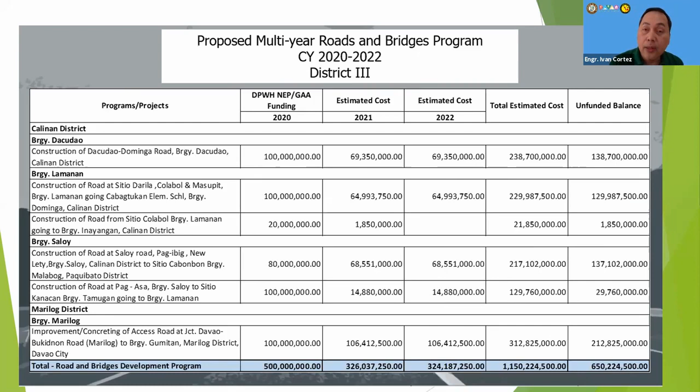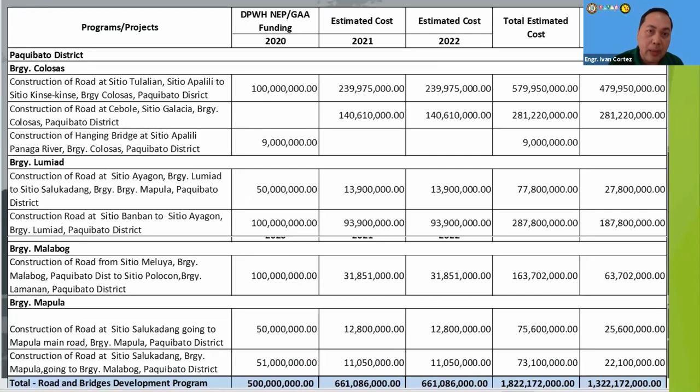We get grants from national government agencies, and shown on screen is a sample of multi-year coordinative funding engagement with DPWH for our roads and bridges program. The one on screen is for District 3, totaling over 1.1 billion pesos, mostly found in the barangays of Calinan and Marilog District, Lamanan also, and Saloy. For District 2, these are some of the projects also under the multi-year roads and bridges program. If you're looking at the screen, you will find that 2020 was already taken up with DPWH under the GAA, or General Appropriations Act.

And then if you're also wondering how we prioritize projects, these are the sources of projects. These documents are the sources of projects. We have mandated plans.

Mandated plans for other initiatives, such as the studies conducted with JICA and other agencies such as ADB. So for the mandated projects, we have the Comprehensive Development Plan. It's updated for 2019 to 2022. We have the Comprehensive Land Use Plan. This is for 2014 to 2022, and the proposed amendments for 2021 to 2028 is now scheduled for second reading

at the City Council. So we're just waiting for the advice of the City Council as to when the second reading will be. We've conducted a series of committee hearings already for the amendments of the CLUP, or the Land Use Plan, or the Zoning Ordinance since October last year to this year.

Executive legislative agenda. This is the time when newly elected councilors will convene together with the mayor and the vice mayor to plot the priority projects for the city. So executive legislative agenda is also part of the listing of projects, wherein we take a look at how to prioritize those projects listed.

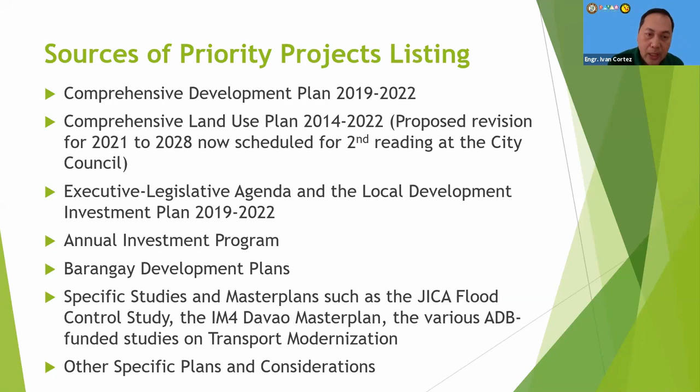And then we have the annual investment program, the barangay development plans, and specific studies and master plans, such as the JICA flood control study, the IM4 Davao, or the Infrastructure Modernization for Davao project, the ADB funded studies on transport modernization, and other specific plans and considerations.

So for other specific plans and considerations, we have the road network development roadmap, the traffic management plan, mobility plan, urban services development plan, economy industry concerns, and social environmental considerations. So some of these plans are also incorporated in our comprehensive development plan.

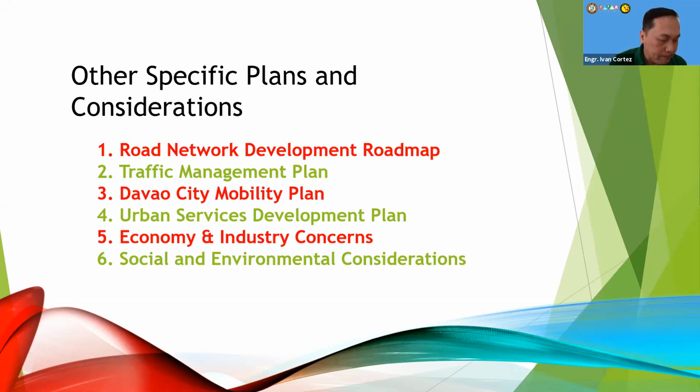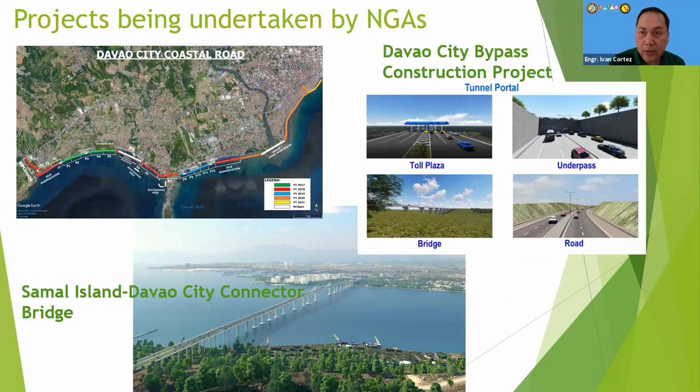On screen are some of the projects being undertaken by the national government for the benefit of the people of Davao. I will not expound on them as they will be presented by the concerned agencies. These are the Coastal Road Bypass Construction Project and the most famous Samal-Davao City Connector Bridge. Also in the pipeline is the Davao City Expressway Project. This has three sections: the Ma-a interchange, the Panacan interchange, and the interchange that will connect Ma-a to Dumoy.

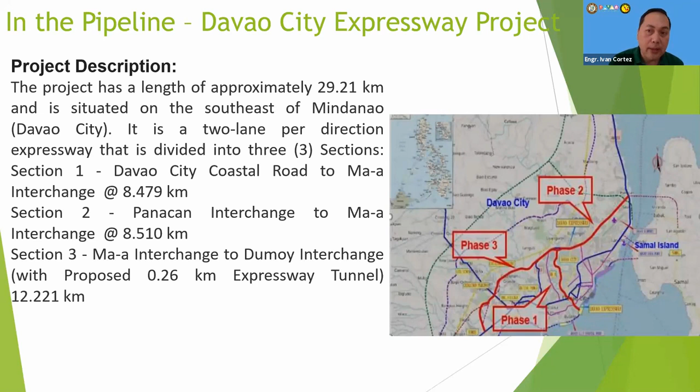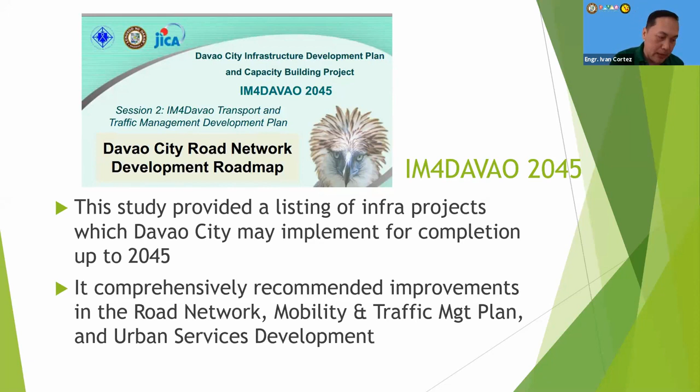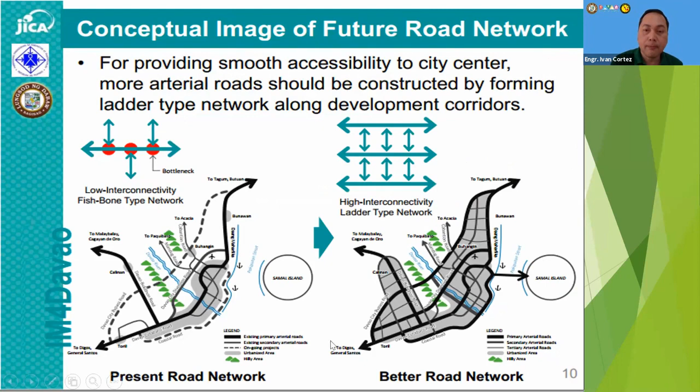Okay? Masyadong malaki.

You will find there on the left side of the screen the present road network, and we're planning to have a better road network by having parallel roads. One of those is the bypass construction project, and also lateral roads crossing each other. Our road network will make sure connectivity and even redundancy and accessibility is enhanced for better productivity and efficiency.

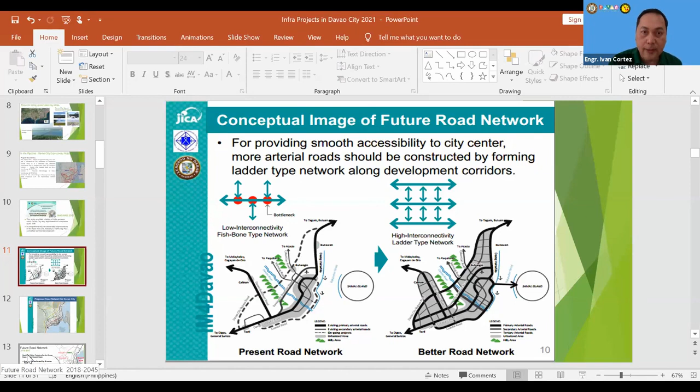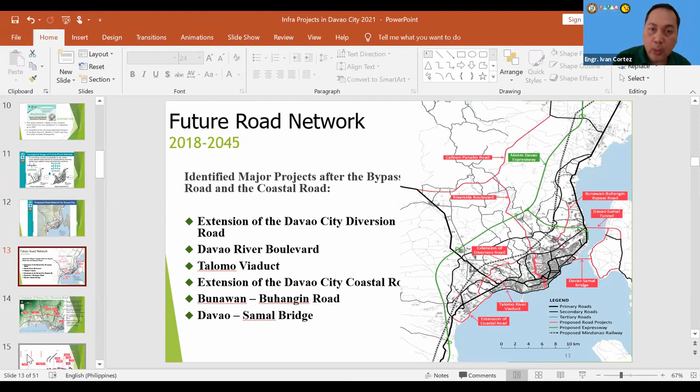So some of the major projects identified in that IM4 are the following. We have the extension of the Davao City Diversion Road, the Davao River Boulevard, Talomo Viaduct, extension of the Davao City Coastal Road, the Bunawan-Buhangin Road, and the Samal Bridge. Those are included already in the 2018 to 2045 IM4Davao study.

So this is an illustration of the extension of the Davao City Diversion Road. As you can see, if you're using the Davao Diversion Road, you will still have to pass through Bangkal. That's where the choke point comes in. And in order to solve that problem, you don't have to go down from the diversion all the way to Bangkal just to meet the traffic there. So this is the solution provided in that study.

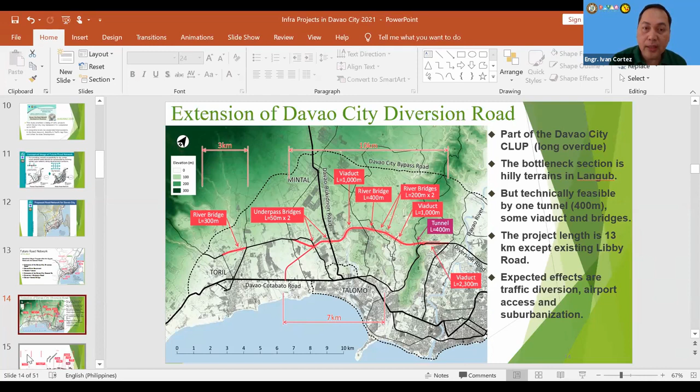So in that study, you'll find that this is an illustration of the bridges that will be needed in order to connect all these road projects and provide that extension for the Davao Diversion Road. This will also require a tunnel, a 400-meter tunnel.

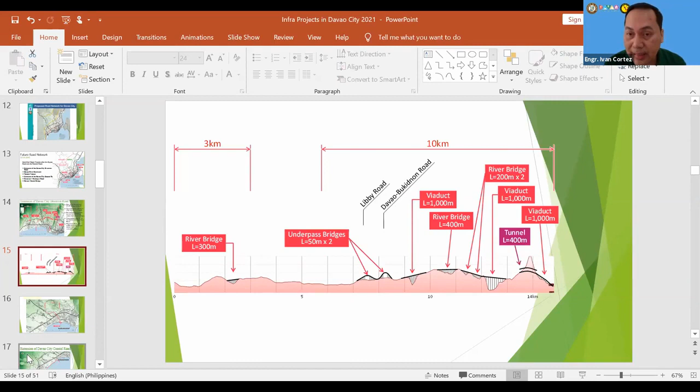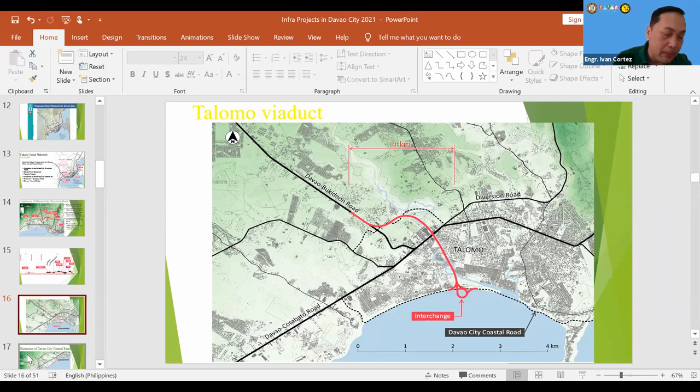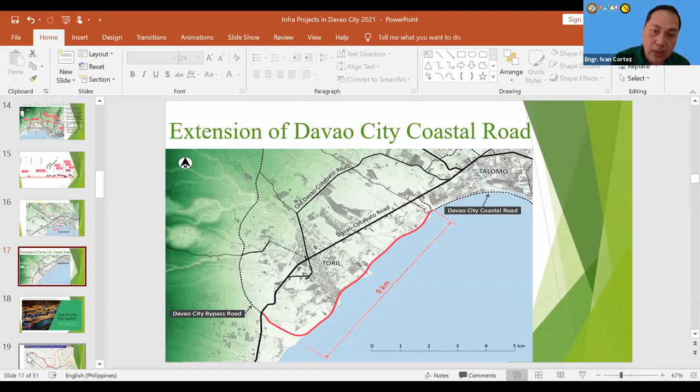The Talomo Viaduct is seen to decongest the Davao Bukidnon-Ulas intersection. This is also in the pipeline already. And then the extension of the Davao City Coastal Road. The extension of Davao City Coastal Road is also in the pipeline. This will connect the coastal road to the bypass road. The extension is in red line, and then you will see the dotted line, that's the Davao City Bypass Road. So from Bago Gallera all the way to the Toril coast, and then all the way to the bypass road.

We are in the thick of things in finalizing the land acquisition activities of bus depots, bus terminals, and bus stops for a high priority bus system, which will have 1,000 buses replacing the 7,000 plus PUJs in the city. This is in coordination with the Department of Transportation. They are the one funding the project.

In preparation for the HPBS, or the High Priority Bus System, the City Government of Davao is already implementing the DIBS, or the Davao Interim Bus Service. In the first quarter of 2021, we have already provided bus services for Catalunan Grande and the Diversion Road route. And the mayor launched these routes just recently.

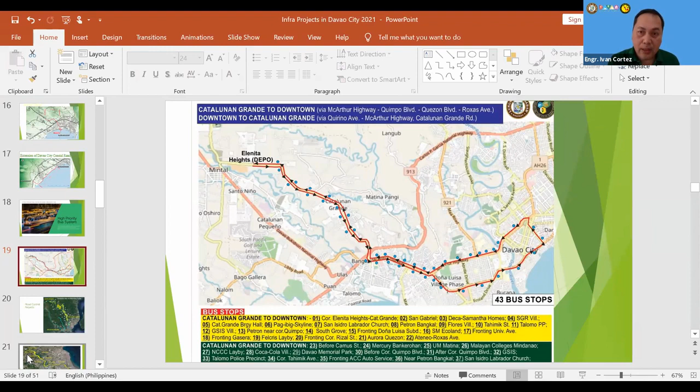We also continue to address flooding concerns. The biggest flood control project that we will schedule for implementation is contained in the IM4Davao study again, which will include... the study also was taken up after the IM for Davao. JICA also commissioned another group of consultants to take up the flood control and riverine projects, involving Davao River, Talomo, and Matina River. So in that study report of JICA, they have already suggested the strategies as well as the listing of projects that must be undertaken in order to address the flooding concerns in the downtown area.

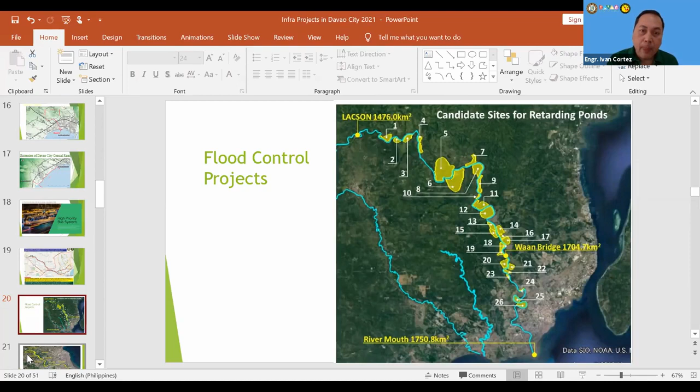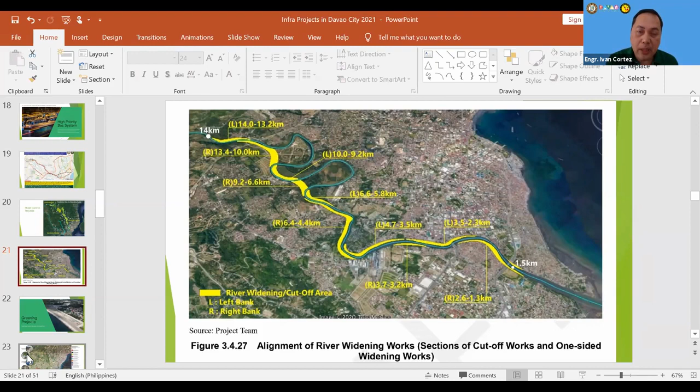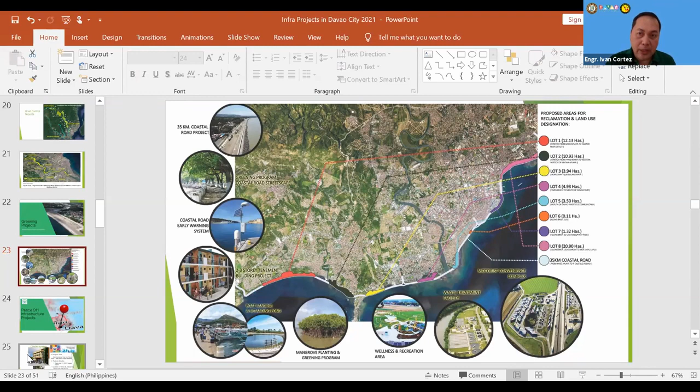So again, the spaces that will be created because of the reclamation project, which is the coastal road, our technical people at the city have come up with this scheme for those spaces, which might include tenement housing, early warning device system, wellness and recreation area, wastewater treatment facility, underground flood control projects, because basically the coastal road created a fence and obstructed somehow the flow of storm water from draining to the sea. But overall, the areas will be largely for greening purposes, as instructed by the mayor. So those areas that were created by the coastal road will really be largely for greening purposes.

Earlier, you've also seen multi-million road projects for the rural areas in districts 2 and 3 for Marilog and Paquibato, but be informed that we have the Peace 911 infrastructure projects. This will allow our fellow Davaoenos in these areas better access to services and facilities, as well as improve their living conditions. When we ask them what infra projects they need, on top of the list are roads, water system, buildings for health centers and schools.

If you will notice, these are areas which are not yet being served by the Davao City Water District. So when these barangays were given the 20 million funding from the national government through ELCAC, end local communist armed conflict project, most of the projects submitted were on roads and water system, as well as school buildings and health centers.

Talking about buildings as part of the infrastructure menu of projects, allow me to show you some of the buildings being constructed in the city, which are aimed to pave the way for better public services.

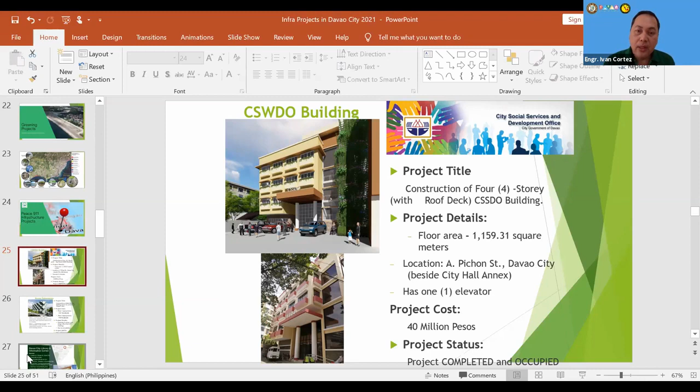On screen is the CSWDO, or the City Social Services and Development Office Building. This project is already inaugurated. Blessing na sila dito. It is a 40 million project.

And then you have the Museo Davaoenyo. The library project for Davao is a 4-story project wherein the higher you go up in that space, the quieter it gets. For the first floor, you can have group discussions. Second floor, you have the learning amphitheater. Third floor, you have the formal reading area where it's really very quiet. And for the fourth floor, you have the administrative area and the AVR.

Let me go back to the museo. Museo is a 195 million project, and this will be managed by the national government once open. So this will become part of the itinerary of every Davao visitor once completed.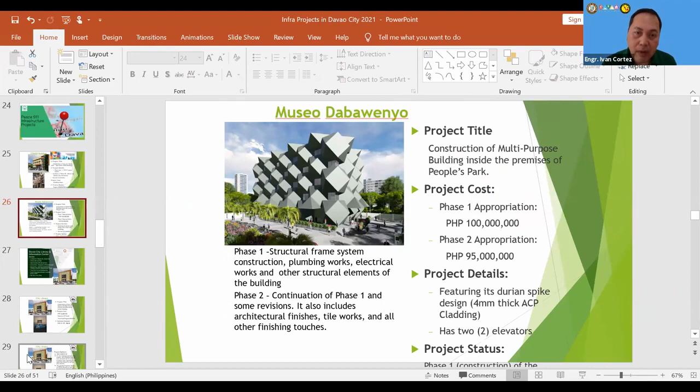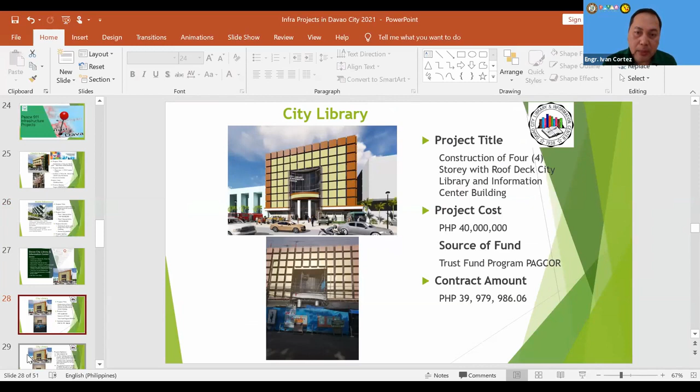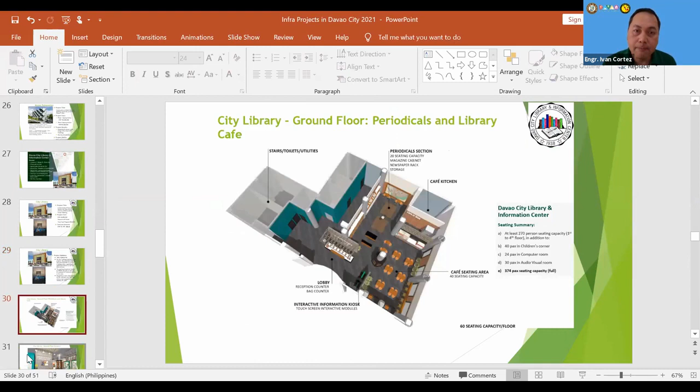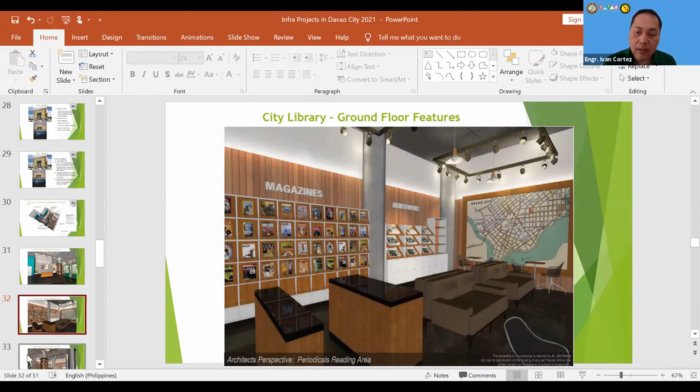Okay, City Library again, 40 million, but the contract amount was 39.9. It's 100% completed in terms of the library structure, but we're still dealing with issues on ISF in the parking area. So these are what's inside the City Library. If there was no pandemic, we would have already opened this to the public on a 24-hour basis, so people can have a place to do their research and other academic pursuits.

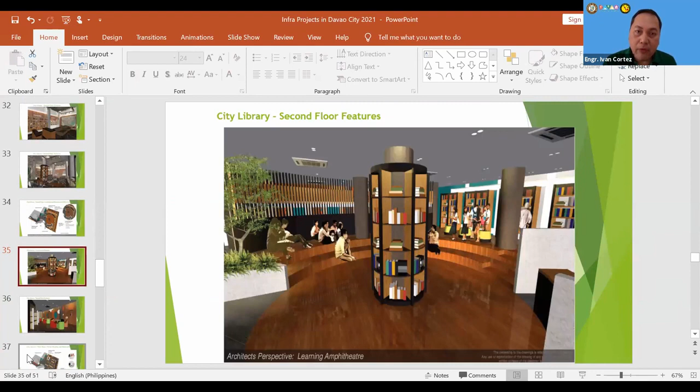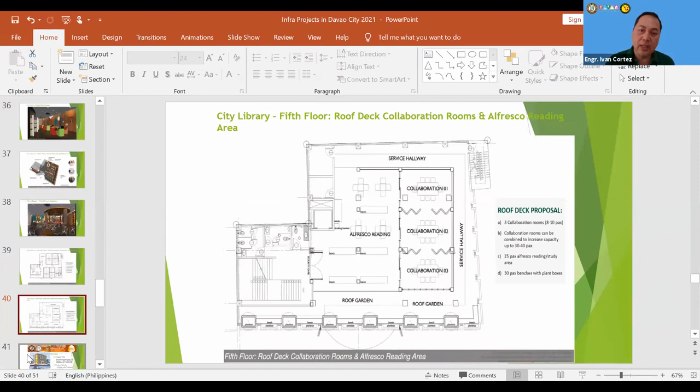Ground floor, that's the second floor of the area. Second floor features. We have the third floor, this is how it will look like. Fourth floor, administrative building. Fifth floor is roof deck. These are some of the suggestions for the utilization of the area.

Another building is the city engineer's office. The contract cost is 60 million, but there's an additional allocation of 80, so it's already about 140 million.

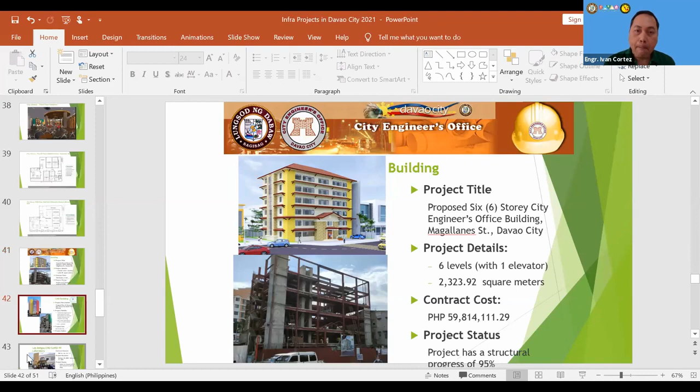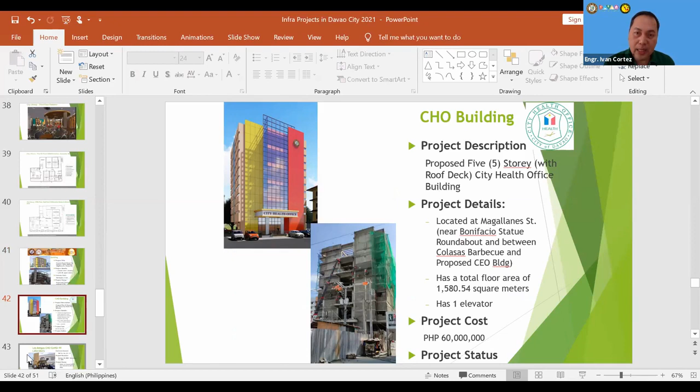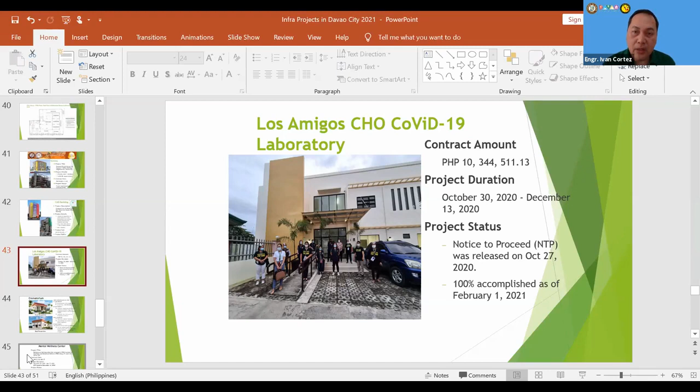So magkapit-bahay lang sila. And then we have just completed the Los Amigos CHO COVID-19 laboratory, a project cost of 10,344,000. And then the crematorium, this is also operational already.

We have the mental wellness center. Notice to proceed was issued last December. Project is ongoing with a progress of 1% as of January 31.

And then the Davao City Special Needs Intervention Center, project cost of 4.5, is in ALS People's Park, Pelayo corner Palma Gil Street.

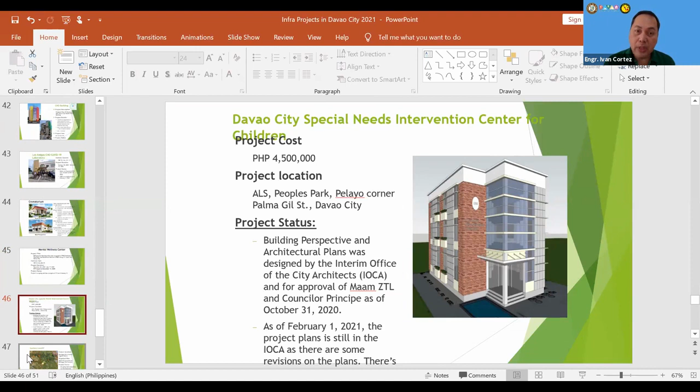Sanitary landfill, we need to have another landfill in the city, and we're targeting the areas beside it to serve the purpose. Instead of scattering landfills all over the city, we decided it's wise to have the next landfill near the current one, so we will not scatter the not so pleasant amenities of a landfill.

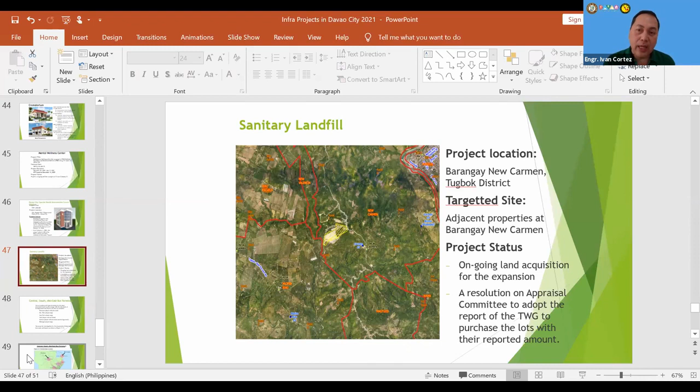Also in our plan and pipeline is the Central, South, and Mid-East bus terminals. We're correcting the notion that Bunawan is the north of Davao, because if you look closely at the entire map of Davao City, Bunawan is really in the Mid-East portion. If you're referring to the northern part of Davao, you're referring to Marilog and Paquibato, with Marilog being in the northwest and Paquibato in the northeast of Davao City.

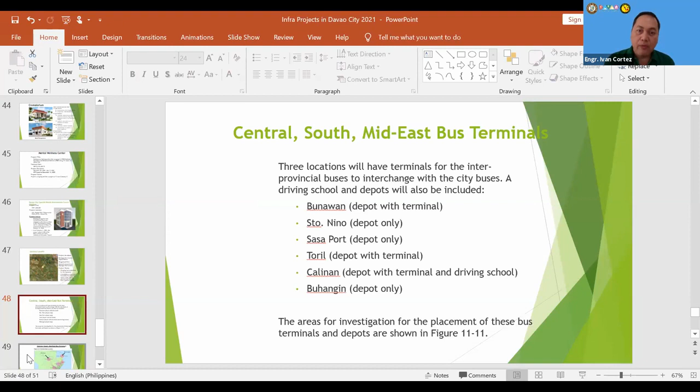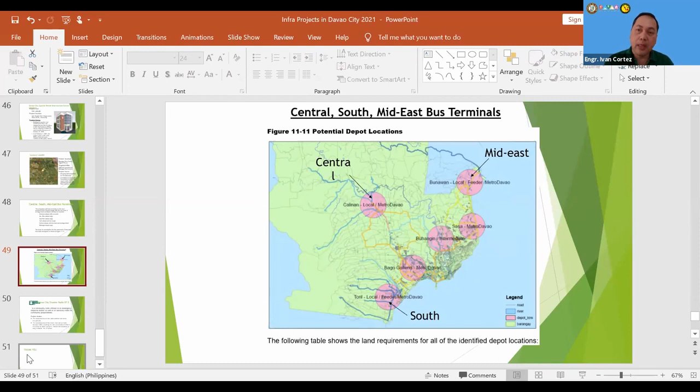So we'll have terminals for provincial buses: central near Calinan, south near Toril, and mid-east bus terminal near Bunawan. We've already scouted areas where these terminals will be located. The idea, as I mentioned earlier about the HPBS, is that once commuters reach the provincial terminal, they will switch buses from provincial to HPBS at those terminals established in the city.

I'm mentioning here the city disaster radio, not purposely to encourage all of you to listen to it, because the mayor is always on board on this channel, 87.5 FM, but also because this relates to my topic about infrastructure, since we are already allocating funds to construct the city tower for radio in the city, so we can have our own tower for this disaster radio. Thank you very much.

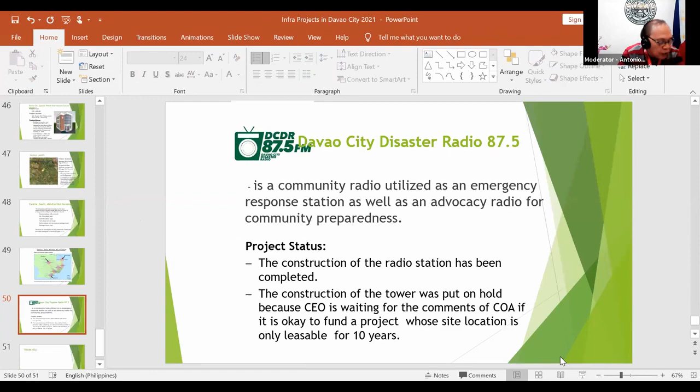This Davao City Bypass Construction Project starts from the Davao Digos section of the Pan-Philippine Highway, Barangay Sirawan, south of Toril, Davao City, approximately 500 meters south of Lipadas Bridge. It will proceed in a northeast-west direction towards Barangay Marapangi and Bato, where it will shift slightly northwest upon crossing the Padas River.

After crossing the said river, it will traverse Barangay Lubogan, Alambre, and move northward into Barangay Gili and Barangay Usiro until it reaches the University of the Philippines Mindanao campus in Barangay Mintal. Then, as the alignment passes to the town proper, it will traverse the Davao area.

This is the Davao-Bukidnon Road. It will cross the Talomo River, then proceed in a northwesterly direction towards agricultural land in Barangay Matina Biao, crossing another waterway, the Matina River, before it proceeds to the tunnel section in Barangay Magtuod. After the tunnel section, it will continue in the same direction towards Barangay Waan, crossing the Davao River.

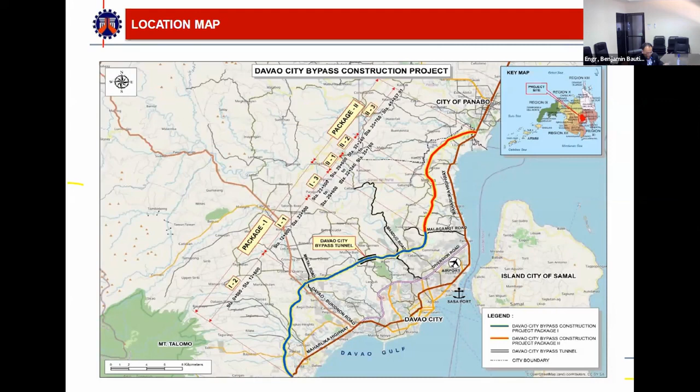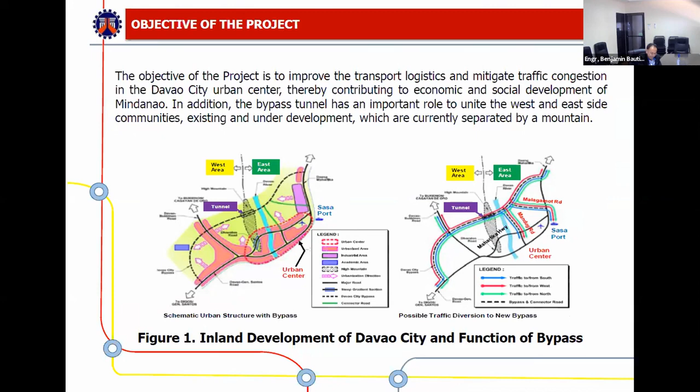This project aims to improve transport logistics, as shown earlier by the previous speaker, and mitigate traffic congestion in the Davao City urban area, thereby contributing to the economic and social development of Mindanao. In addition, this bypass tunnel has an important role in uniting the West and East communities, existing and under development, which are currently separated by a mountain.

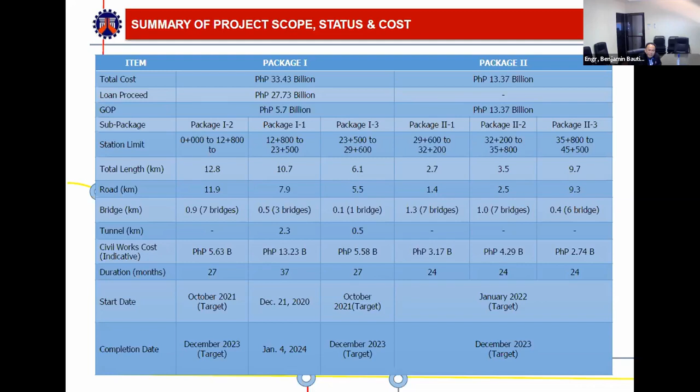Originally, this Davao City Bypass project was divided into two packages, but because the cost of the project is very big, we further divided package one into three contract packages: 1.1, which is now ongoing, 1.2, and 1.3. Package 2 was also subdivided into three contract packages: 2.1, 2.2, and 2.3. Package 1 started December 21, 2020. This is now the implementation schedule—we are now on package 1.1, which began construction last December 21 and will be completed by the end of 2023.

And for package 1.2, 1.3, it is now under procurement. And then also for package 2.1, 2.2, and 2.3, it will be procured by the third quarter this year.

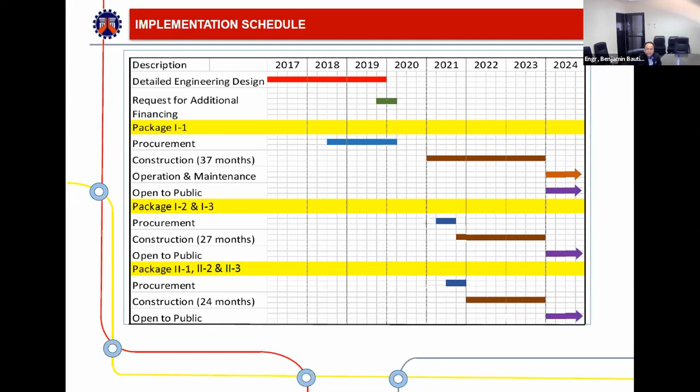So for package 1.1, the scope of work is construction of 4 lanes, meaning 2 lanes each direction, with a length of 7.9 kilometers with 3 pairs of bridges, length 0.5 kilometer, two underpasses, 2 overpasses, 15 box culverts, 4 at-grade intersections, and 2 tunnels with a length of 2.3 kilometers. It is under contract with the Shimizu, Ulticon, Takenaka joint venture, and the project cost is 13.2 billion, started December 2020, and expected completion is January 4, 2024.

So as of now, the project schedule status is we have achieved 0.48% accomplishment.

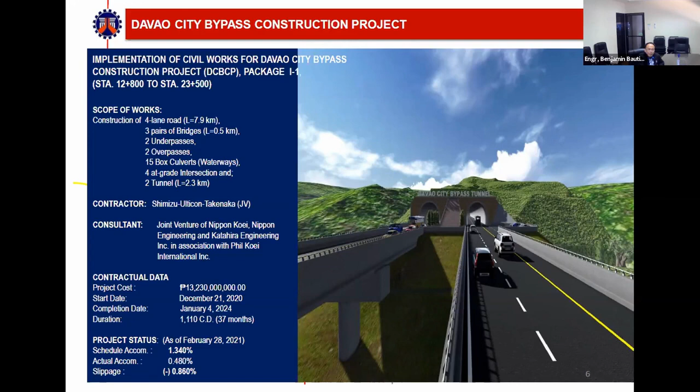And this is now the ongoing activities of Package 1-1. We started installing the project signboard and also mobilization of equipment.

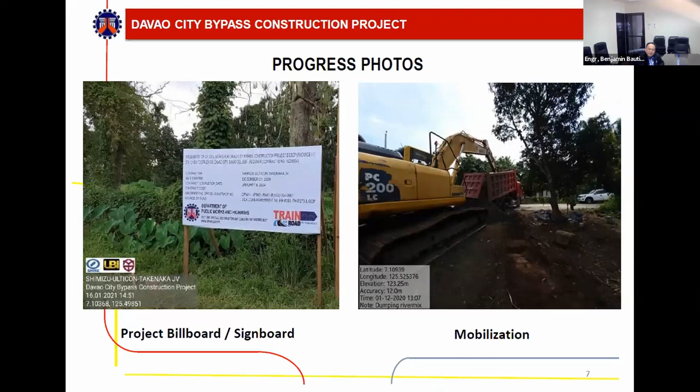We are now on the improvement and construction of the access roads leading to the main alignment, especially the portals of the tunnels, so that the equipment coming from Japan, especially the boring equipment, which according to the contractor is already ready for shipment, will be directly transported from the port in Davao to the portals of the proposed tunnel.

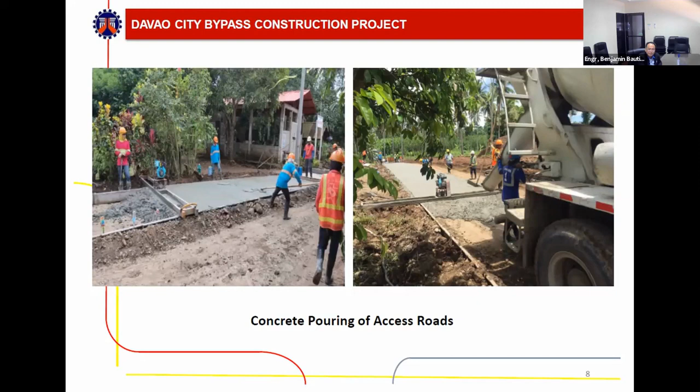With regards to package 1-2, it is also a 4-lane road, 2x2, with a length of 11.9 kilometers, 7 bridges, and 1 underpass along Davao Bukidnon Road. And package 1-3 is also a construction of 4-lane road with a length of 5.5 kilometers, 1 bridge, and 2 cut and cover tunnels with a length of 0.5 kilometer.

As of now, the status of these 2 contract packages: the project cost is estimated at 5.63 billion for 1-2 and 5.58 billion for 1-3. The target start of this project is October, the last quarter of this year, and target completion will be December 2023.

Now we are just waiting for the concurrence of bidding documents from JICA. Once JICA Tokyo concurs with the bidding documents, the procurement will start. So expectedly, the procurement will start by the fourth week of April.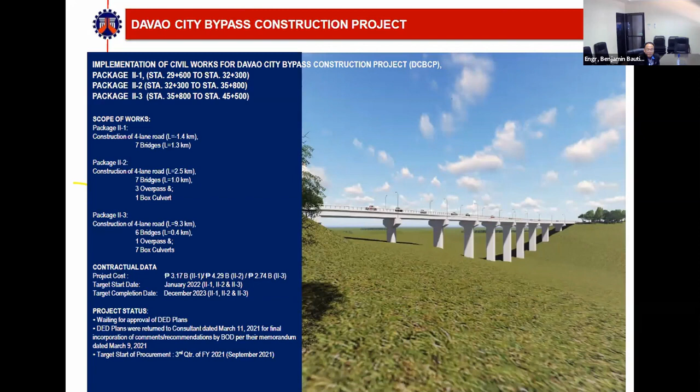At present, the detailed engineering design is on progress, and we will start the procurement of these 3 contract packages in the third quarter within this year. So that's all for Road Management Cluster 1, under which we are implementing the JICA assisted project.

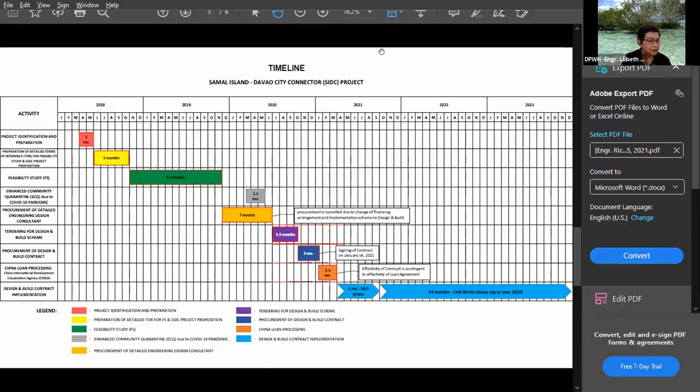May I ask Ms. Anna to share the presentation? I hope I could finish this presentation before I lose my internet connectivity. Okay, thank you. Ms. Anna, can you see it now? Okay, I may also check if I'm delivering good audio. Yes, yes, okay. Thank you very much.

So if I may begin, the design and build contract of the Samal Island Davao City Connector project will be funded by the Government Concessional Loan Facility under the China International Development Cooperation Agency, or CIDCA. Next slide, please.

The project SIDC is a proposed bridge in Southern Corridor to connect the Samal Circumferential Road in IGaCoS to Davao City across the Pakiputan Strait, passing over Lisade Street to the junction of R. Castillo and the Daang Maharlika. It has a total length of 3.98 kilometers, including Davao ramps and a roundabout in Samal, with a width of 24 meters and a navigational clearance of 47 meters. The project cost is 23.04 billion and will be implemented from 2021 to 2026.

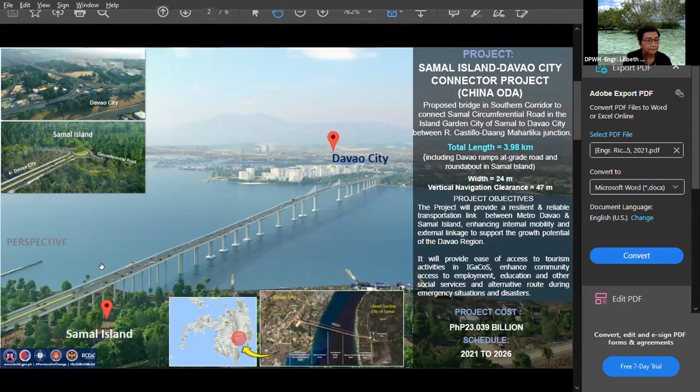This project has been endorsed by several agencies. The bridge in the Southern Corridor was endorsed by the Infrastructure Development Council Committee on February 26 and approved by the Regional Development Council on March 26, 2019. It was also endorsed by the City Development Council of Davao City Executive Committee, also endorsed by IGaCoS Council on October 10, 2019. Also endorsed by the Davao del Norte Provincial Development Council on November 14, 2019, and the Sangguniang Panlungsod, City of Davao on November 19, 2019.

We also received a resolution of the Office of the Punong Barangay, Barangay Vicente Hizon on November 21, 2019. And the RDC resolution endorsed to the NEDA board through the Investment Coordination Committee the approval of the Samal Island Davao City Connector project. Likewise, we received a PAMB resolution giving support or clearance to the SIDC being outside the Samal Island protected landscape and seascape of the Expanded National Integrated Protected Area System.

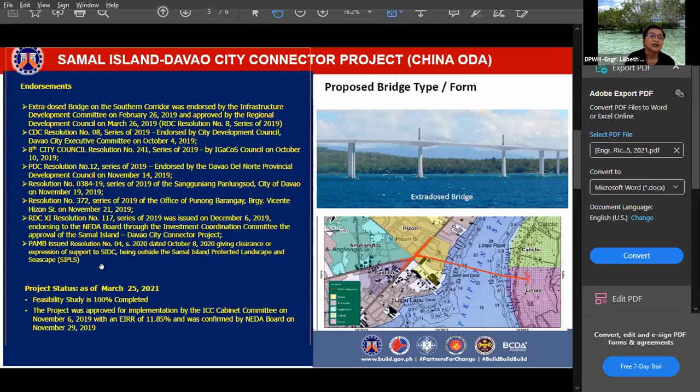On environmental and social safeguard updates, the Environmental Compliance Certificate was already granted by the Environmental Management Bureau of the Department of Environment and Natural Resources on December 17, 2020. The SIDC team has started to mobilize in the project site to coordinate with the LGU and DPWH regional and district offices and other stakeholders on the formulation of the City Resettlement Implementation Committee intended for the purpose of a smooth implementation of right-of-way acquisition.

For the design and build scheme, the procurement of design and build contract was carried out from October 2020 to December 2020 with the notice of award issued on December 14, 2020 and was conformed on December 16, 2020 by the winning bidder, China Road and Bridge Corporation. The signing of the design and build contract agreement was conducted on January 14, 2021, and DPWH submitted the following day the signed contract agreement to DOF to head start the loan negotiation process, and that is within the China ODA protocol. We first conducted the procurement before the start of the loan negotiation.

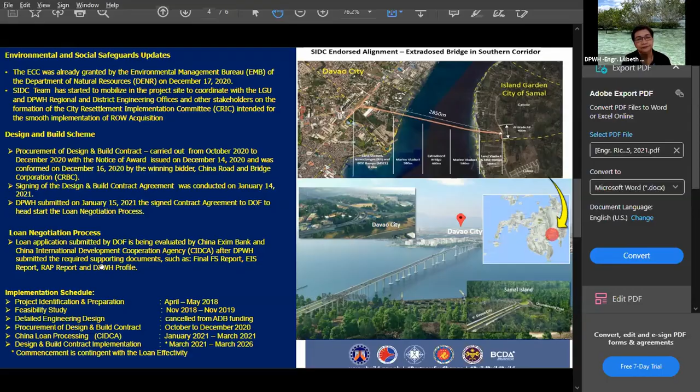And now, the next slide, please. Or the next slide. Okay. The next slide is just a graphical presentation of our timeline.

But before I end, allow me to end this presentation with the visualization video for the better appreciation of SIDC. This is just a 2-minute presentation. And again, thank you very much.